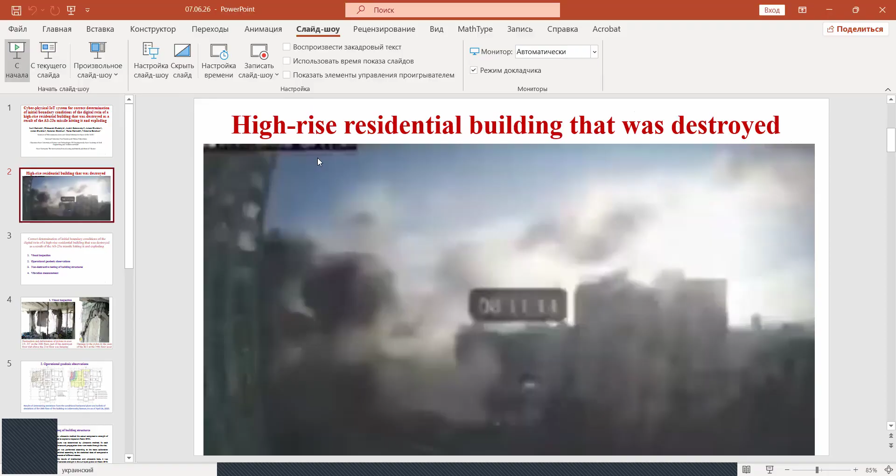On the second slide, you can see the high residential buildings that were destroyed. This is a building which will be investigated. This is a Russian missile AS-23.

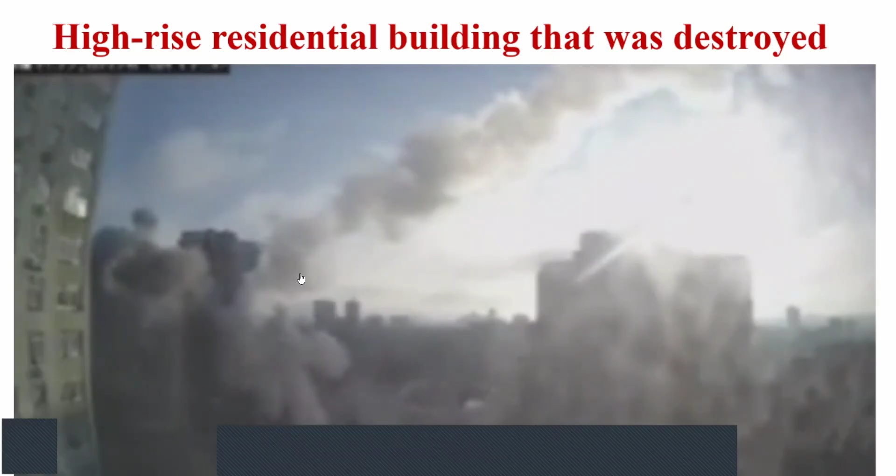Correct determination of initial boundary conditions of the digital twin of a high residential building that was destroyed as a result of AS-23A missiles hitting it and exploding consists of 4 steps. First, visual inspection. Second, operational geodetic observations. Third, non-destructive testing of building structures. And fourth, vibration measurements.

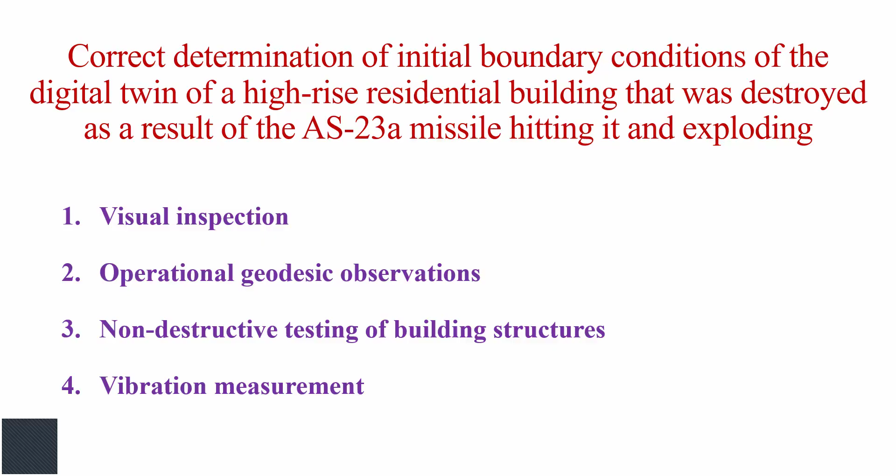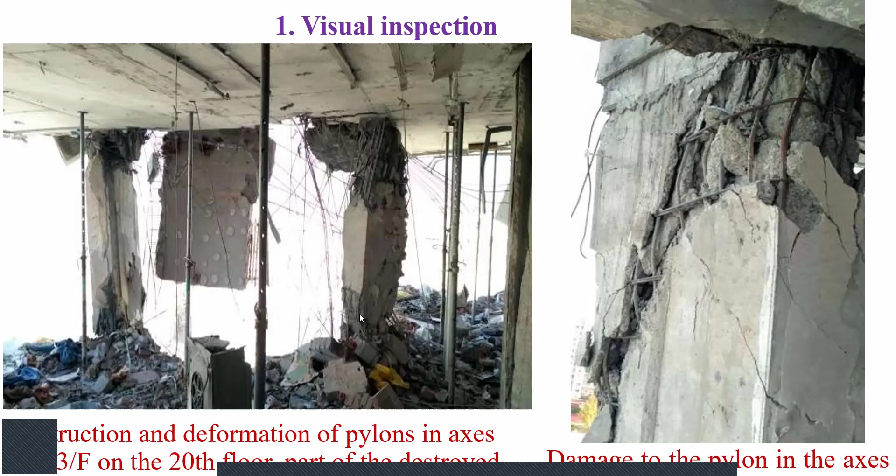In the first step, visual inspection, you can see building constructions of high residential buildings were destroyed by missile attack. The destructions and deformations of pylons in axis 2F, 3F on the 20th floor were part of the destroyed floor slab. About the 21st floor was hanging. You can see absence of some walls on this floor, and these are some rings which will support the top plate.

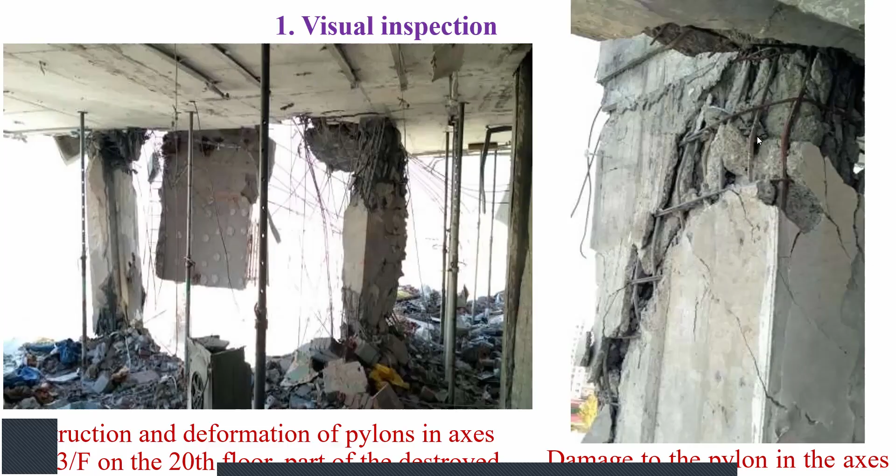On the second building, you can see damage to the pylon in the axis of G2 at the 19th floor level. You can see the cracks on the pylon. After visual inspections, we conducted the geodetic observations.

On this slide, you can see results of determining deviations from the conditional horizontal plane and isofields of deviations of the 25th floor of the building on Lobanovsky Avenue 6A as of April 26, 2022. On the right side, you can see isolines of different areas. These are vertical deformations. In yellow color, you can see vertical deformations from 0 to 50 millimeters. In green color, vertical deformations from 50 to 100 millimeters.

In the blue area, you can see vertical deformations on this plate from 100 to 150 millimeters. In the red area, you can see deformations from 150 to 200 millimeters. In these parts, you can see deformations from 200 to 250 millimeters.

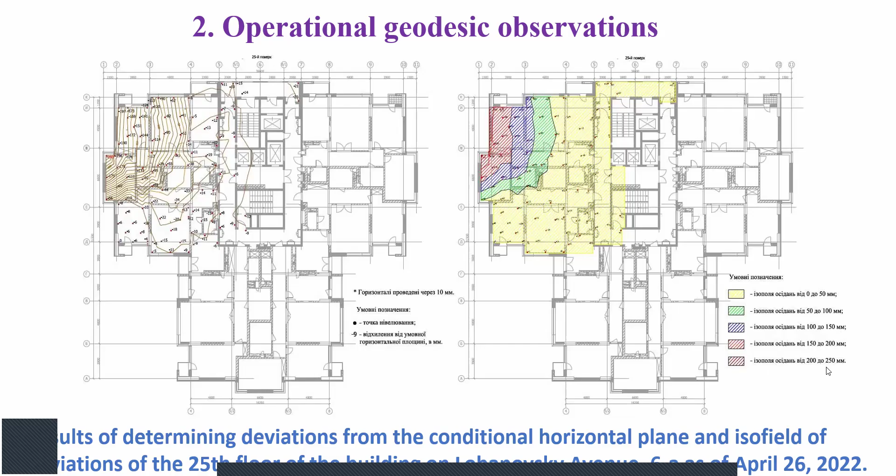After conducting the geodetic observations, we conducted non-destructive testing of building structures. The research task is to determine by ultrasonic methods the actual compressive strength of concrete in pylons that were subjected to explosive impact on floors 18-21. The strength of concrete in structures was determined by the ultrasonic method. In each structure, 10 measurements of ultrasonic propagation time were made through the ribs.

The calculation of concrete strength was performed according to the basic calibration dependence time-strength, established according to the statistical data of comparative mechanical and ultrasonic tests of concrete of different classes. As a result of generalization of the results of mechanical and ultrasonic tests, it was established that the average value of concrete strength in the surface of pylons of floors 18-21 in axes 1-4/E-K is in the range from 16.6

megapascal to 33.6 megapascal. This indicates that the actual strength of concrete in controlled pylons is lower than the design strength for concrete of Ukrainian class C25/30. The average strength is 38 megapascal. If you compare the 16 value with the 38 value, you can see this is a reduction of approximately 50% from this value.

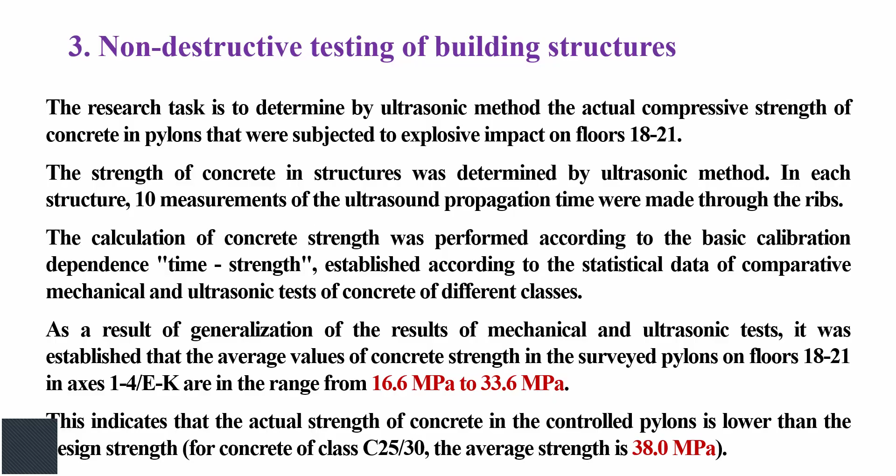This demonstrated the destructive effect of the missile attack, where we can see a lot of different cracks in building constructions of these high residential buildings. These many cracks are a result of the missile attack, and the conclusion from this is the deterioration of the technical condition of this building and the need for reconstruction of these walls, different plates and building elements of this building.

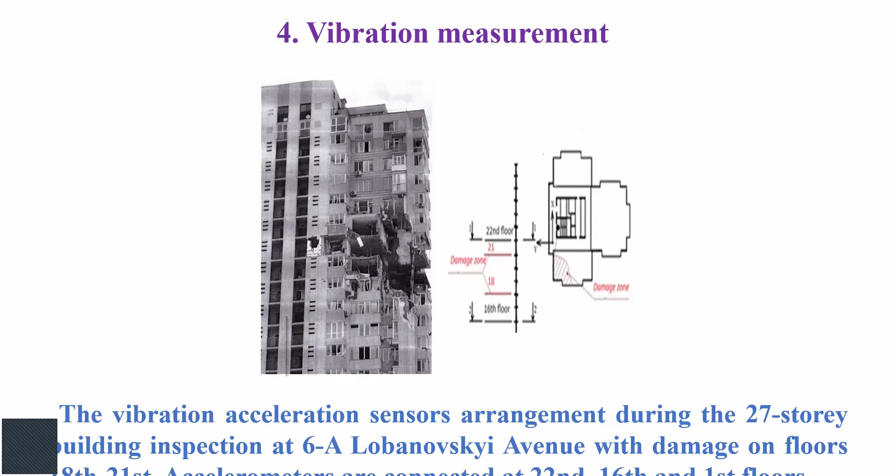On this graph, you can see amplitude frequency spectra of building vibrations in the X direction at the 3 points according to scheme 2 at the level of the first floor at 6A Lobanovsky Avenue. The building was damaged within the 18-21 floors. Pay attention, please, to this natural frequency, approximately 2.3, and natural frequency

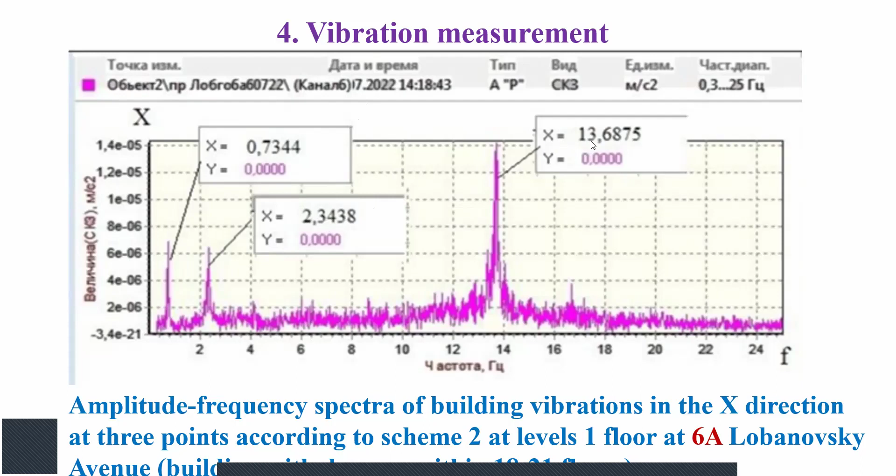13.7. And in this graph, you can see amplitude frequency spectra of vibrations of a building at 6B Lobanovsky Avenue in the X direction at 3 points according to scheme 2 at level 1. An analog of the building at 6A Lobanovsky Avenue.

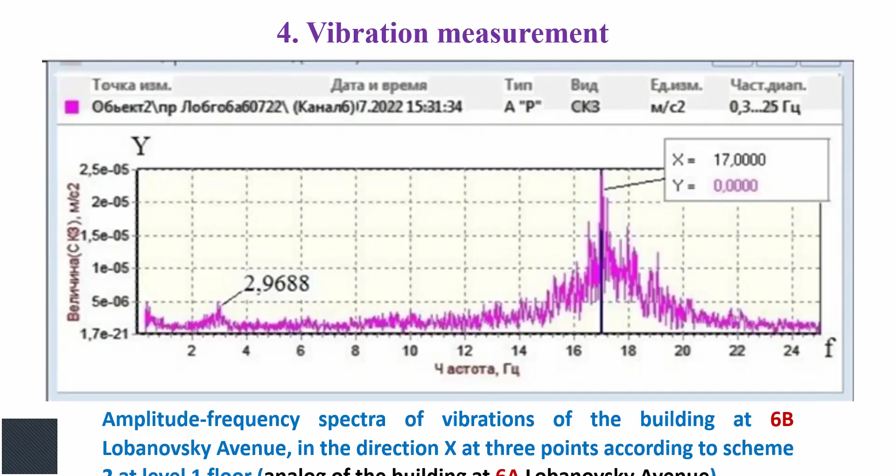In this graph, you can see higher frequencies, 2.9 and 17, and the previous 13.7 and 2.3, compared with 2.9 and 17. You can see the slowdown of the natural frequency of the building on the first floor, which is the result of the destruction process in the whole building. The cracks exist in all floors of these buildings, and this is a very bad prognostic result.

On this slide, you can see structures that need to be restored and replaced on the 19th, 20th, and 22nd floor level. These are parts fully absent on this floor that must be fully recovered. And these are parts where maybe some reconstruction works can be conducted, not full. And these parts are fully absent and must be replaced.

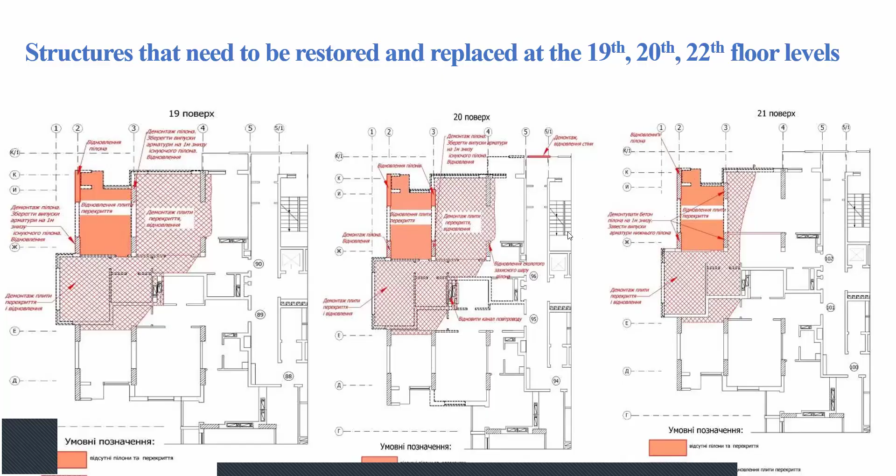Conclusions. First, visual inspections of the structure and elements showed signs of damage and destruction. The destruction occurred with the collapse of the corner parts of the building in axes 1-3 E-K within the range from 18 to 21 floors. The load-bearing and enclosing structures in the range from 17 to 27 floors were significantly damaged.

Second, as a result of engineering and geodetic measurements, it was established that in the area of the building damaged by the explosions, deviations from the conditional horizontal plane of the 25th floor reach 241 millimeters. The maximum deviations are concentrated in the area of damage. The relative difference in vertical displacements is 9 times higher than the permissible one.

Third, the average value of concrete strength in pylons near the destruction zone of floors 18-21 is in the range of 16.6 MPa to 33.6 MPa. The actual strength of concrete is lower than the design 38.0 MPa. The decrease in the actual strength of the concrete could have occurred due to damage to the concrete structure from the impact of structures during the explosions and vibrations of the frame due to numerous breakages of the reinforcement, impacts from the fall of large fragments, etc.